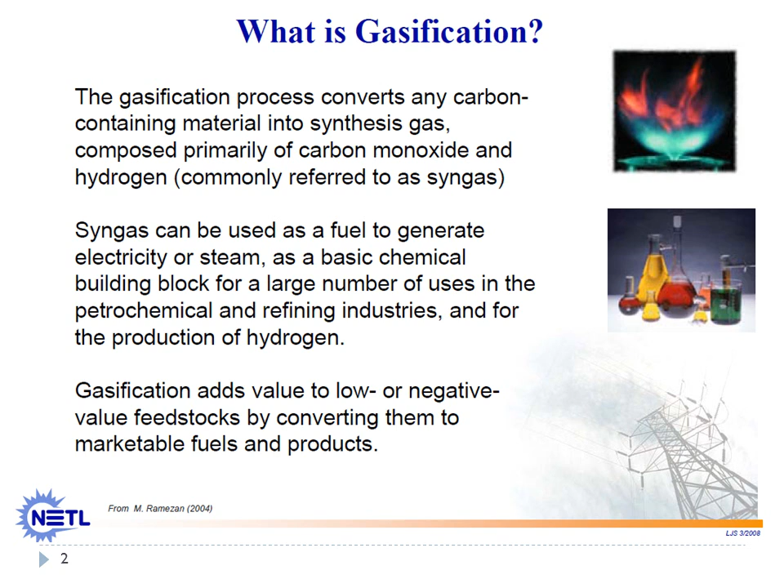I want to point out that these entrained flow gasifiers are some of the higher temperature and pressure gasifiers. There are many other types of gasifiers that operate at much lower temperatures and/or pressures. I just want to point out that some of the, we'll call it, modern ones are operating at very high pressures and temperatures.

What you're doing inside the gasifier is mixing water and coal, likely slowly feeding them in - taking low pressure water and coal, putting them together, and slowly pumping them up to the pressure of the gasifier. You're also taking oxygen, probably coming from a cryogenic separation plant where you cool air down and distill out oxygen from nitrogen. Once you distill out liquid oxygen, it's fairly easy to compress it to the pressure you need in your gasifier. Of course, you've got to heat it back up, but that's not too hard since the temperatures here are very high, and it's easy to get the oxygen's temperature back up to where it needs to be to enter the gasifier.

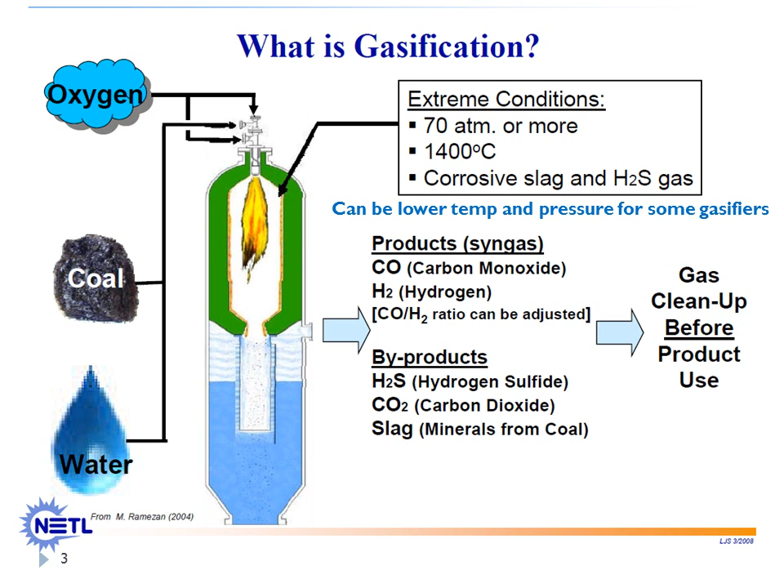These things are going to become molten and then likely molten on the side walls, perhaps interacting with your wall material. I want to point out that it's one of the definite areas of research, the molten ash wall interaction. So before you can do anything, you're going to have to get rid of those byproducts that you don't want.

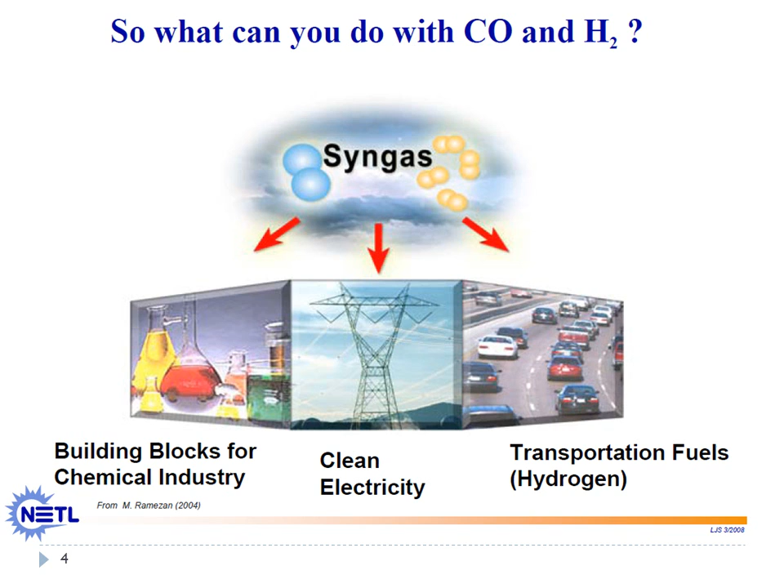But of course the drive here is that once you have the carbon, if you clean the carbon monoxide and hydrogen, you now have the building blocks for the three major industries. You have the hydrogen that can be used in PEM fuel cell vehicles to drive your car, which, if you live in Los Angeles right now, you can purchase. The second one, electricity, is available almost everywhere. You can combust the carbon monoxide and hydrogen and generate electricity, or you can use it as the building blocks for polymers or fertilizer.

We can have something called the water gas shift, and this could occur inside the gasifier, and could also be occurring outside of your gasifier. The goal of a water gas shift reactor outside the gasifier would be, let's say, if you wanted to tweak the H2 to CO ratio, you'd maybe add water so you had more hydrogen and less carbon monoxide. Or if your goal was to make hydrogen for PEM fuel cell vehicles, you'd put in a lot of water vapor and generate hydrogen in that water gas shift reaction.

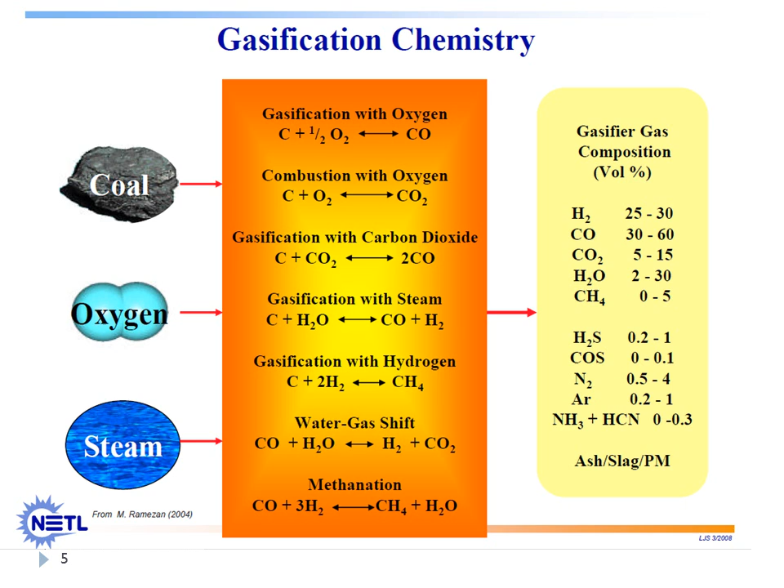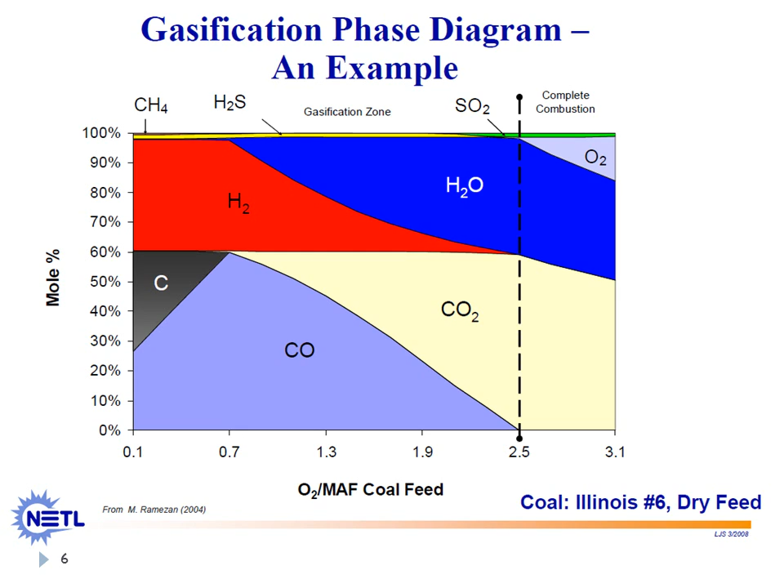With that steam, you can use it to heat buildings, but most of the time it's being used to generate electric power. With gasification, most gasification plants are not used to generate electricity. There are a large number of gasification plants in China that are being used for the production of hydrogen to make ammonia for fertilizers, as well as the production of plastics.

Here in the United States we have a few gasification plants that are being used to generate electrical power, but there's also a couple being used to produce natural gas, as well as others being used for production of ammonia or other chemicals.

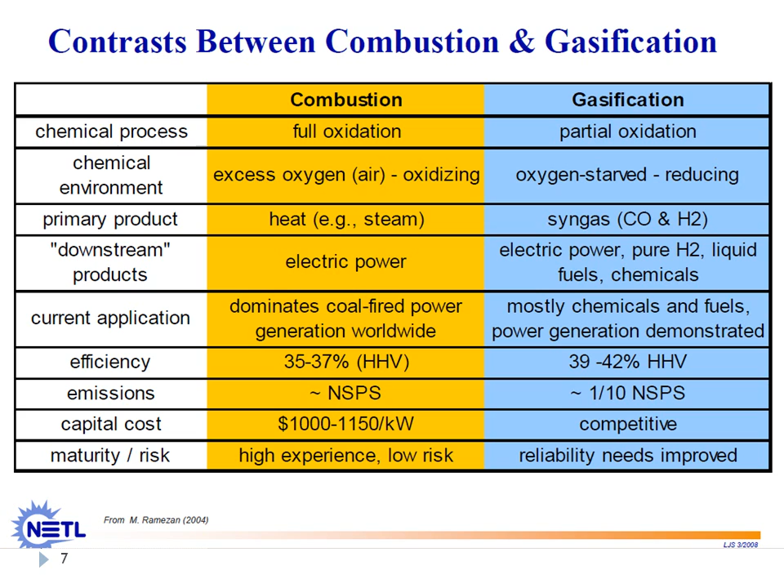Capital costs for these power plants depend greatly. These are some fairly old values in dollars per kilowatt. These numbers have escalated over time, particularly in the 2008 time period when the cost of everything was getting more expensive. It's a little difficult to tell where those costs are right now, especially for gasification, because these are only being built, maybe one every couple of years, or here in the U.S., maybe one every decade. In China, they're being built a lot more, I'd say on the order of one every couple of years.

Next I'm going to show a little bit more pictures of what's going on here. Just trying to remind everyone that this gasification is an extremely flexible type of concept, because we can be taking in carbon-based feeds such as asphalt, coal, or heavy oils.

These are oils that are extremely high in viscosity. Petroleum coke, as mentioned a little before, builds up often in catalyst beds, particularly where they're trying to change the carbon to hydrogen ratio, getting rid of some of the carbon to make it a lighter oil. A lot of times you're left over with this coke. By coke I mean like graphite - it's a solid, a graphite material with a lot of impurities such as sulfur, maybe some nickel, some of the catalyst might be in there as well.

You could potentially also take natural gas, mix it with oxygen to make syngas, and that's something called gas to liquids, where you take natural gas, combine it with oxygen to make carbon monoxide and hydrogen, and then turn that carbon monoxide and hydrogen into gasoline or diesel fuels.

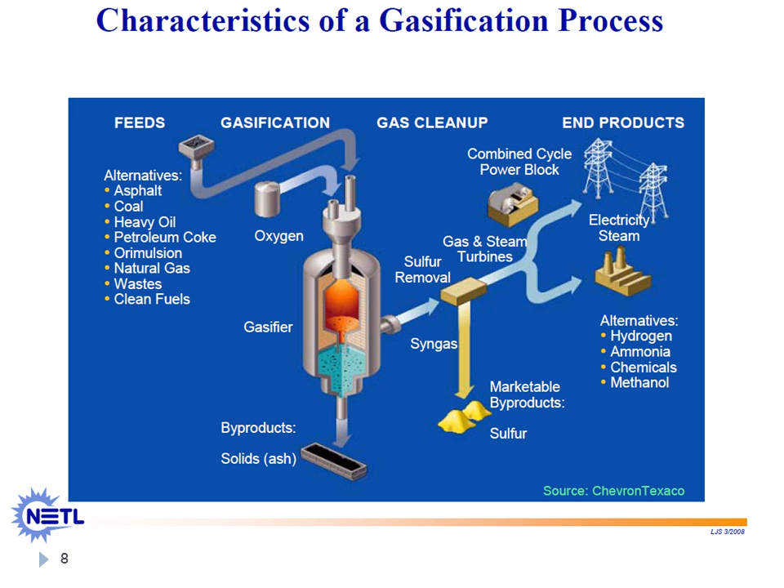Okay, this is the same slide, just from a different perspective. We've got our feedstocks coming into the gasifier, ash coming out the bottom. This is showing, once again, all the different options we have available. So gasification, once again, is extremely flexible.

What I said, you can separate out the hydrogen for transportation fuels. You could also take the hydrogen directly to a fuel cell to generate electricity. Your fuel cell could be your electrical source at the power plant, rather than a combined cycle.

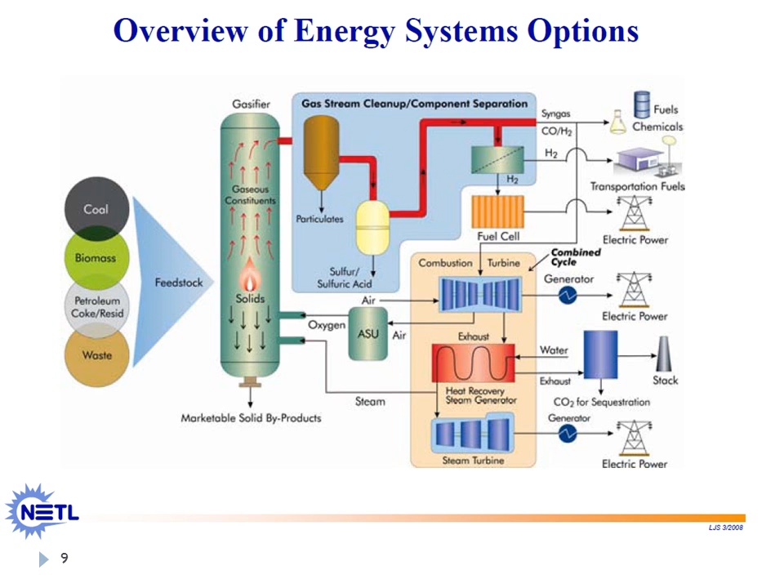But what we're seeing right now, as far as electricity generation, is the fuel going to a combined Brayton cycle, followed up by a Rankine cycle.

And here's even more to follow up what I meant by gasification being extremely flexible. There are a number of different types of gasifiers, and we'll be going through those in this set of slides, a number of different environmental control systems, as well as a number of different options for conversion or final products.

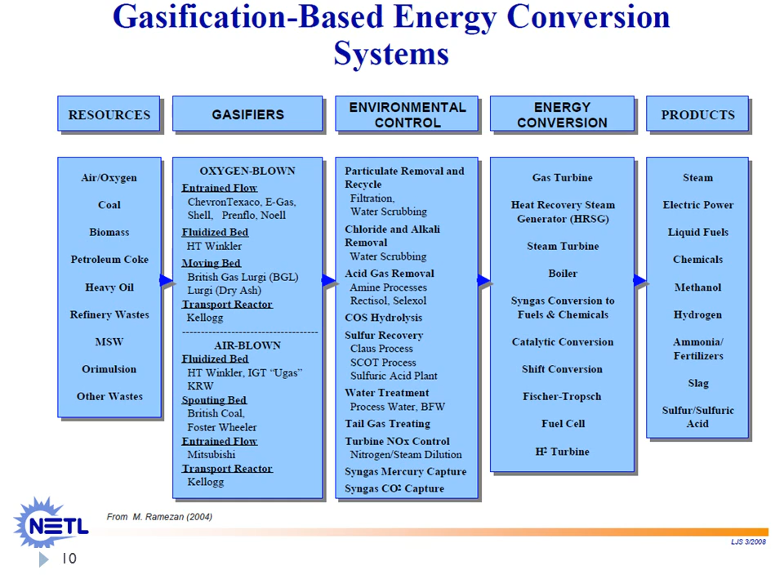Next thing I want to do is compare and contrast a conventional coal power plant with an IGCC power plant, and just give you a feel for the flow of enthalpy throughout the power plant. So in this case, we're going to start with there being 100 megawatts of enthalpy. This is the combustion enthalpy of the coal.

So at a conventional pulverized coal power plant, you're adding coal into a boiler, and that 100 megawatts enters into the boiler and is used to heat up steam. Maybe about 85 megawatts of the original 100 megawatts goes into the steam, which means about 15 megawatts is leaving as enthalpy in the flue gas.

So that 85 megawatts of enthalpy of steam goes to a steam turbine, and in the ultra supercritical, modern coal power plants, about 40 megawatts of that 85 megawatts of steam can exit as electricity, and the other 45 megawatts of enthalpy leaves as cooling water.

Now, just as a reminder, I'm not talking here about exergy, because there's very little exergy in that 45 megawatts of cooling water, and very little exergy in that stack flue gas. The amount of exergy is maybe 2 megawatts in the stack, and maybe 2 to 3 megawatts of exergy in that cooling water.

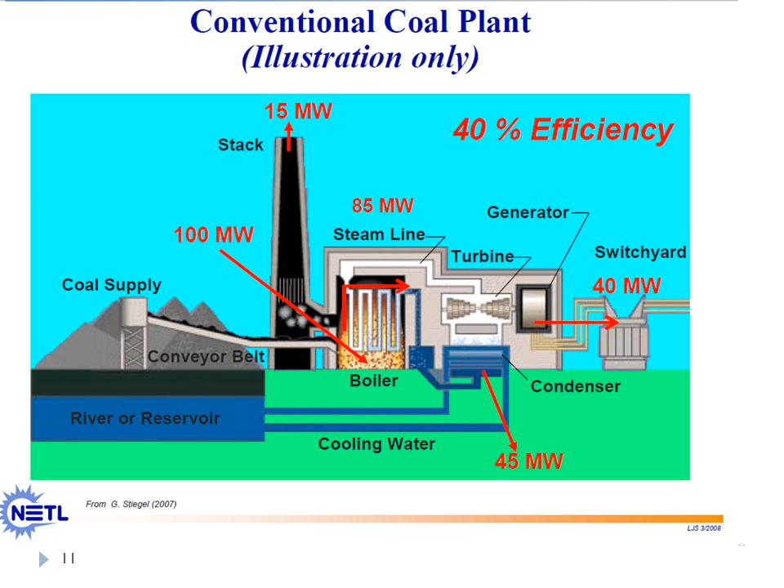Okay, so in that last case we had an efficiency of about 40%. Coal-based IGCC power plants are typically around 40 to 43% as well, but it's going to look slightly different. So in this case, we're going to take that same 100 megawatts of enthalpy, and feed it into a coal gasifier. In addition, we're going to send in some oxygen.

That oxygen is actually going to need 9 megawatts of electrical energy, which we're going to have to subtract off in our final calculation of the power. So that goes into the gasifier, as well as steam that was generated from the syngas when you cool it.

And so then what's going to be entering into the Brayton cycle is going to be 80 megawatts of enthalpy in the form of hydrogen and carbon monoxide. We're going to combust that in a gas turbine. We're going to generate about 30 megawatts of electricity, and that leaves us with about 50 megawatts of enthalpy in that flue gas. And from that flue gas, we're going to...

...take it to a heat recovery steam generator. We're going to generate some steam, and we're going to have steam, that 15 megawatts of steam that was generated from the syngas cooler as you cool down the syngas.

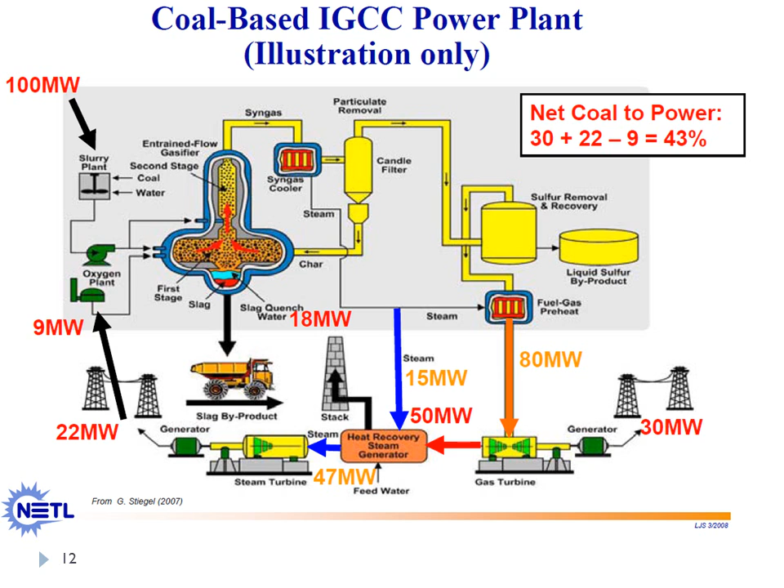This can also be shown in what's called a Sankey diagram. This is a little bit closer to what we'll be discussing later when we show exergy, when we try to calculate the exergy destruction in each of the subsystems.

Here, what's happening is you're flowing through the raw exergy of fuel, and you can see where exergy is actually lost and where exergy is taken and moved other places, such as that steam that bypasses, coming from the gasifier from cooling the syngas and being sent over to the steam cycle.

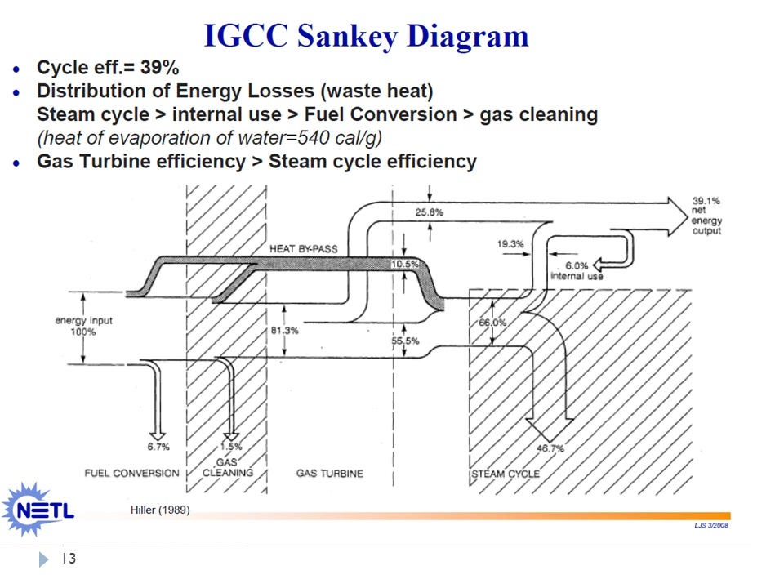This calculation was done back in 1989, and calculated a net efficiency of about 40%. Efficiencies now for a coal gasification plant without CO2 capture are closer to 43%.

The next thing I want to do is give a little bit of history about fossil fuel use. The history goes back a very long time. China was one of the first countries to start using coal, and then it really started taking off around the 1800s.

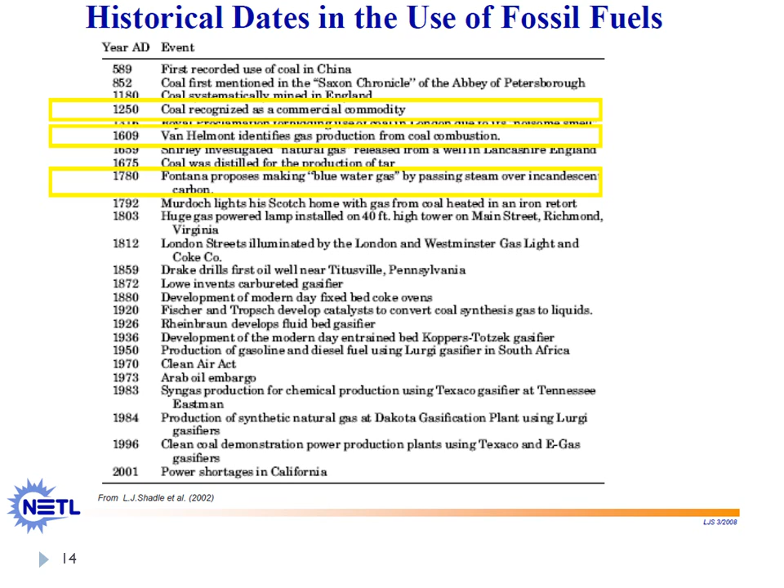In the 1800s, there were actually a lot of coal gasifiers. Most cities had their own coal gasifier. So it's kind of interesting that coal gasification, which right now is not a concept very well known, was a very well known concept over 100 years ago.

Towns would have these combined processes in which they would take coal, partially combine it with oxygen in one reactor, and then take those hot coals over to another reactor in which they would quench it with water. The act of quenching with water would cool it off, but it would also generate hydrogen and some carbon monoxide.

So that gas from the quenching with water would be sent in pipes, and it was used like, if you've ever heard the term the gas lamp district in San Diego. These are gas lamps. Originally, the gas is coming from these coal gasifiers, where you're taking hot coal, mixing it with water, and that town gas is about 50% hydrogen, with the rest composed of methane, carbon dioxide, and between 3 to 6% carbon monoxide.

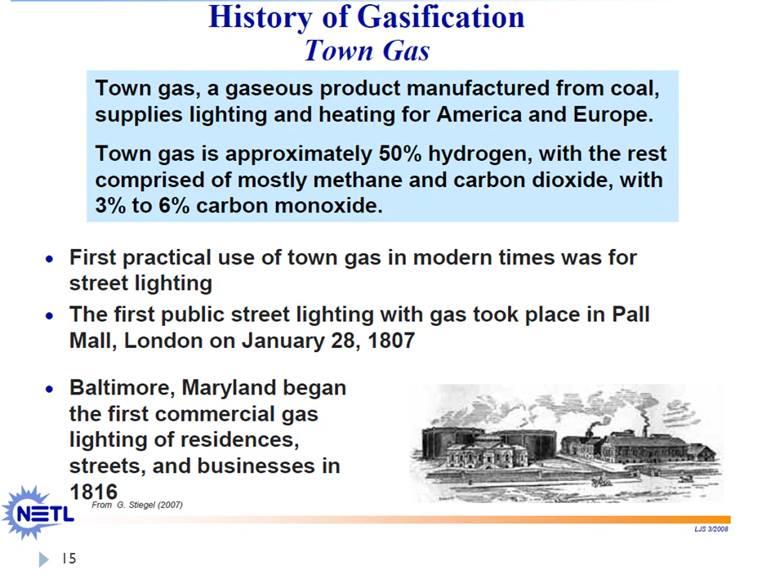And the modern natural gas industry produces a product that is safe for us to use in our homes. Safe for most of us to use in our homes. There's always going to be some people who will figure out how to misuse it.

So what I want to point out here is gasification really started taking off, and then it went out with the advent of natural gas drilling in the early 1900s. Those town gas plants started closing down, and there was almost no gasification, particularly around World War II.

Other than in a few places such as Germany, where there were large amounts of coal reserves and not much natural gas. Then you started seeing locations around the world with large coal reserves and not as much natural gas. You started seeing in the 70s and then the 80s and 90s a generation of coal gasification plants.

One of the first big jumps in the late 1970s is shown here as the Sasol 2 and Sasol 3, coal gasifiers in South Africa used to generate liquid fuels. They were taking coal and turning it into liquid fuels, starting around the time there was a ban on selling liquid gasoline fuels to South Africa. So South Africa decided to create their own liquid fuels. There were also some here in the U.S.

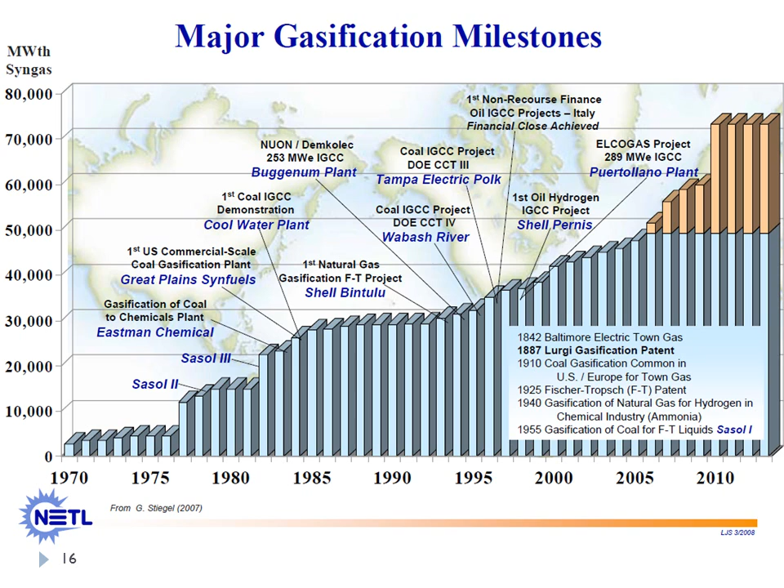One of the first coal gasification IGCC plants was demonstrated in the mid-1980s, called the Cool Water Plant in the U.S. We also have the Buggenum plant, which I believe is in the Netherlands. We have the DOE-funded Wabash River and Tampa Electric plants in the 90s. Then there's the Puertollano plant in, I believe, Spain, coming just before the 2000s. And then most recently, Duke Energy, a few years ago, built an IGCC power plant in Indiana.

Here I'm going to go through a couple of slides where we talk about the different types of gasifiers.

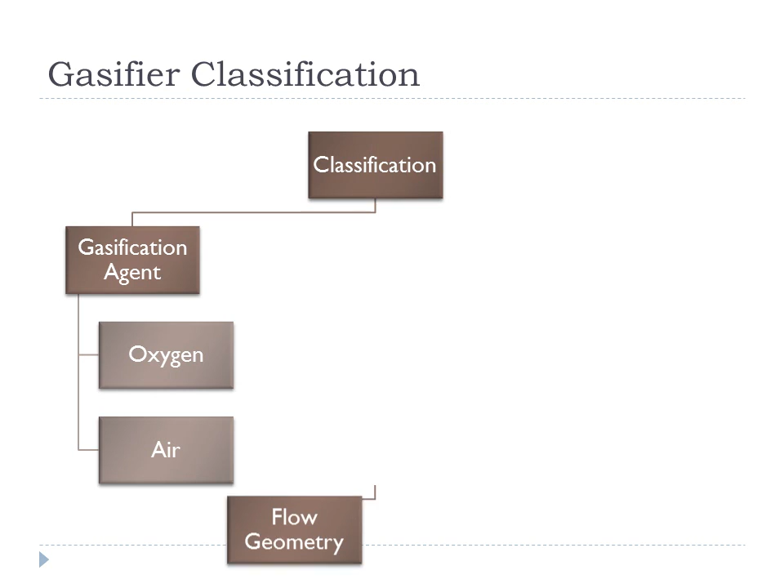The first thing we'll talk about is the gasification agent. We can use pure oxygen coming from an oxygen separation plant, or potentially just use air. You probably would not use air if you're trying to make chemicals or do CO2 capture, because the nitrogen dilutes everything. But if you were just doing biomass gasification for power plant production, you may use air because you don't want to do the oxygen separation, and that would be the case if you didn't need to capture CO2.

You have a number of different flow geometries. You could run counter-current, where the coal drops in from the top and oxygen comes in from the bottom, running counter to each other. Or you could have co-flow, in which the oxygen, coal, and steam all start in the same location, and the syngas comes out the other side of the reactor.

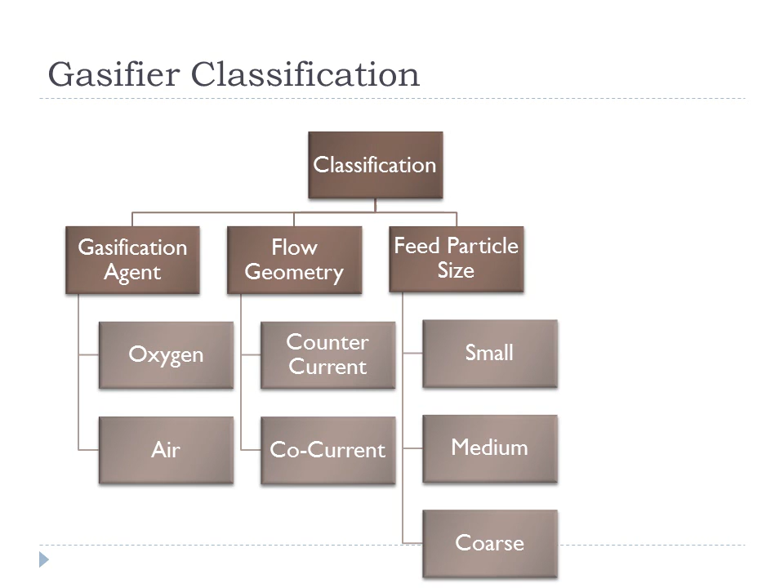You could have variable feed size: small, meaning only micron size, or anything up to coarse, meaning if you put in municipal solid waste, something the size of a plastic cup. Here we're talking about a macroscopic scale.

Ash removal can be done depending on the gasifier temperature. You may stay below the ash melting point, which we call dry ash removal, or the ash may leave as slag, which we call wet ash removal, when the temperature at which the slag leaves the gasifier is above its melting point. That melting point is a function of a lot of things, largely the ratio of the number of basic species to acidic species in the ash.

By basic species, I don't mean aqueous bases—we're talking about solid bases or solid acids. Solid bases are lime, or calcium or magnesium oxide, or other basic species like potassium and sodium, or lithium. These are all solid bases. The solid acids are silica, SiO2, or alumina.

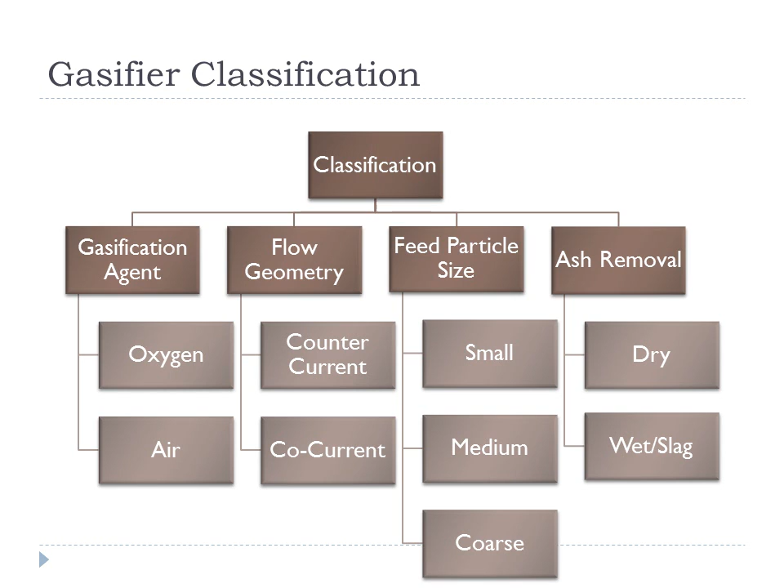Something with a very low melting temperature typically occurs when the base to acid ratio is close to 1. When you have equal amounts of acid and base, that typically creates a low slag melting temperature, and as you move away from that 1 to 1 ratio, that causes a higher slag temperature. Something like pure lime takes a very high temperature to melt, as does pure silica. But when you mix silica with lime, and particularly add some sodium, the slag temperature can start dropping down. So whether you have dry or wet ash removal depends on the ash composition as well as the temperature.

Here we're going to cover the gasifier types in words before showing pictures. We have the moving bed, and Lurgi is the most famous of the moving bed gasifiers. We have entrained flow, which includes GE, Shell, ConocoPhillips, and Siemens designs. Entrained flow gasifiers are slagging gasifiers, run at such high temperatures that you're above the melting point of the ash. In between these two is the fluidized bed, which could be either a transport gasifier or a high temperature Winkler gasifier. I'll go through all of these in the next couple slides.

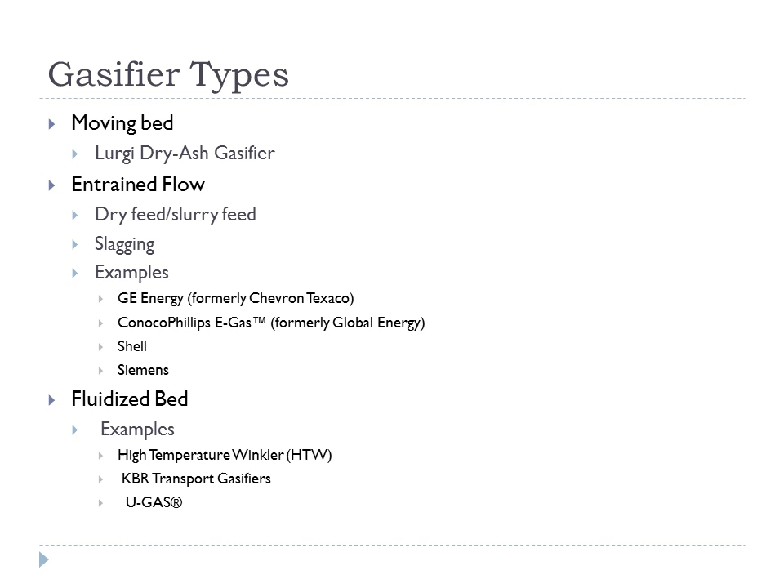Let's start with the example of the moving bed, which we'll spend more time on in detail. The moving bed is a counterflow gasifier: coal comes in the top, and steam and oxygen enter the bottom. A lot is happening, but one way to describe it is that it's very much like a counterflow heat exchanger. If you look at the temperature profile from top to bottom, the coal entering from the top is being heated by the gas that's leaving, just like in a counterflow heat exchanger. The coal is being heated up and the gas is being cooled off.

The gas can leave at around 1,000 degrees F, maybe 500 to 600 degrees C. On the bottom, there's also a counterflow heat exchanger effect: the oxygen and steam come in cold and are heated by the ash leaving the system. The ash acts like the hot side of a heat exchanger, but there's no wall material—it's direct heat exchange. This makes it a very efficient type of gasifier because it's built in counterflow mode, and counterflow heat exchangers are typically much more efficient than co-flow designs. As far as efficiency goes, a moving bed is very efficient.

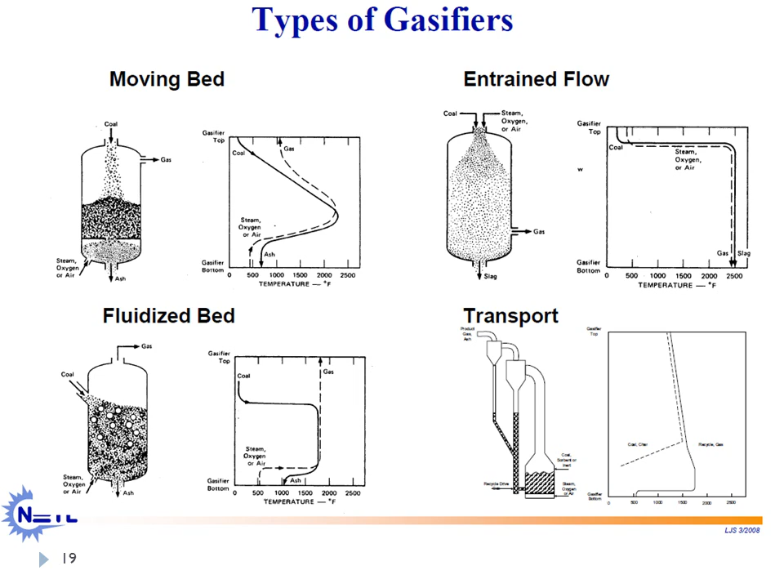Okay, here's some more pictures of the gasifier types. Going through, starting on the left, this is a picture of the Lurgi dry ash gasifier.

The bottom one is closed and the top one is open. The feedstock goes in at atmospheric pressure. You then close the top feed, so both are closed. You then pressurize it with pressurized gas from your gasifier. You open the bottom one, let the feedstock drop in, then close that and suck the pressure out of it so it goes back to atmospheric or below, because you now have syngas you don't want to release to the environment. So you empty out all the gas, and then you can finally open the top and put feed back in. It's not the most efficient, but it works, and lock hoppers have their own issues.

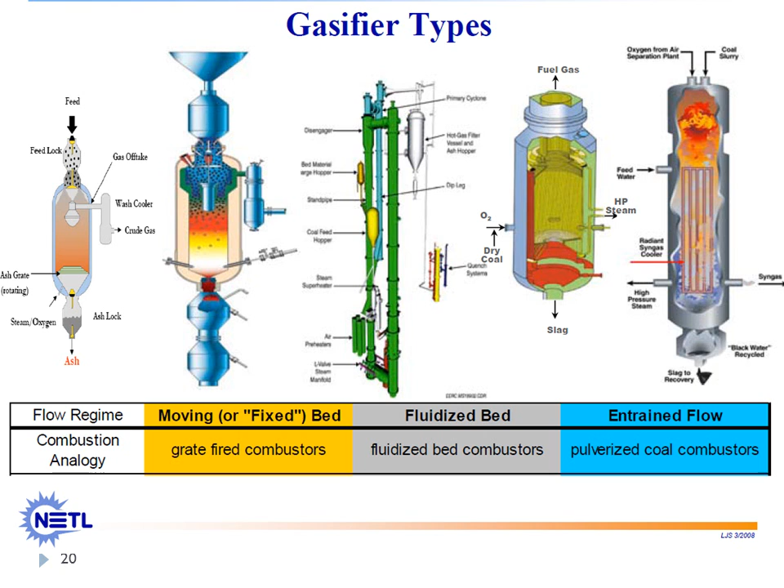Most moving beds are done with a low coal rank. By low coal rank, I mean subbituminous or lignite coal, which has much higher reactivity than a bituminous or anthracite coal. And because reaction rates are fairly slow in the moving bed due to the size of the particles, moving beds are best for highly reactive coals. Those are the coals that have been underground the least amount of time, which are the lignites and subbituminous. The longer it's in the ground, the more it becomes like graphite, and graphite reactions are much, much slower than the reaction rates for a lignite coal or a biomass.

So this is why for biomass you could be sending it to a moving bed. Municipal solid waste likely has typically the same reaction rates as biomass, or faster, and so a moving bed may make a lot of sense for a waste gasifier, particularly because your municipal solid waste may be very hard to make into very fine particles. Because of all the other junk that might be in it, you may not want to pulverize it, so a moving bed makes a lot of sense for municipal solid waste.

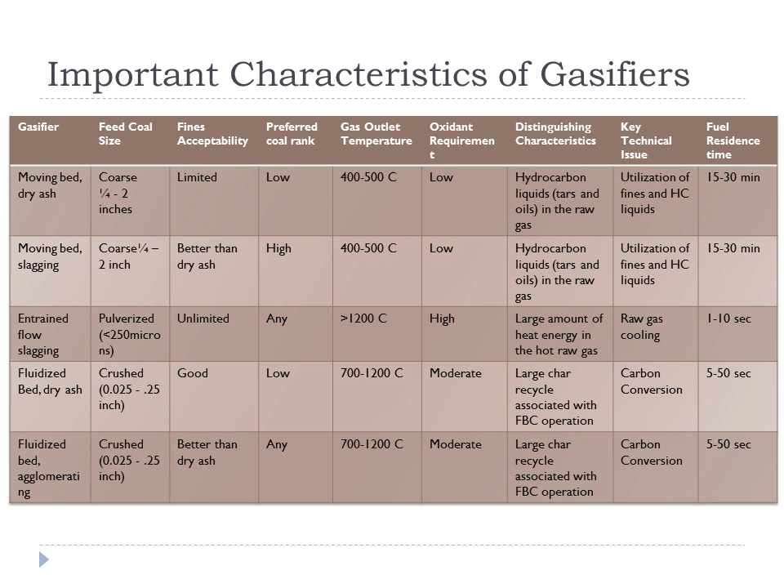So there's going to be a lot of things that could affect a gasifier: the energy content of your fuel, the moisture content of the fuel, the amount of volatile matter. That's particularly going to be an issue in those moving bed ones. You may have a lot of tar production, and you may or may not want the tar being produced.

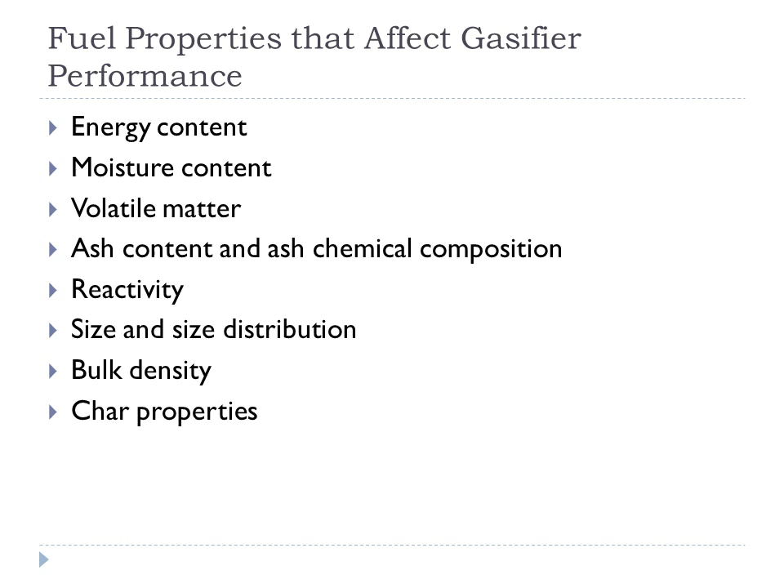Of course, the ash is going to have a major effect. If you just have a lot of ash, then you're heating up and cooling a lot of ash, and that's very inefficient, which normally lowers the efficiency of your process. The reactivity of the coal is going to be important, as well as its size or size distribution, and its density could be important, particularly also its char properties.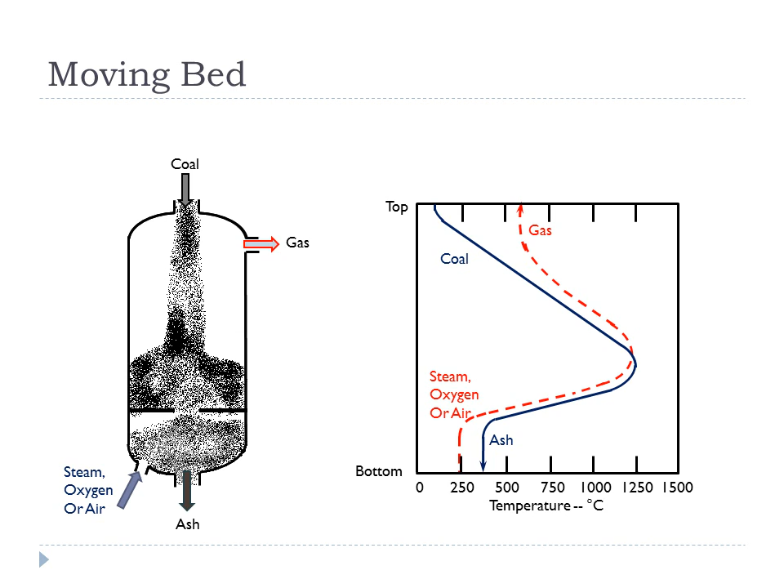As I said before, we have a counterflow heat exchanger between the gas and the coal, as well as a counterflow heat exchanger between the ash and the steam or oxygen. So this is where the moving grate would be, kind of at the bottom of this bed, and the coal is being dumped in at the top, and we have residence times on the order of 15 minutes to 30 minutes.

The dry bottom Lurgi gasifier was developed with cooperation of the University of Berlin. It's now owned by Sasol, which is a South African company, and they are still designing new gasifiers. I think they're on the Lurgi Mark 5 or 5 Plus. They continue to make new gasifiers of this moving bed type.

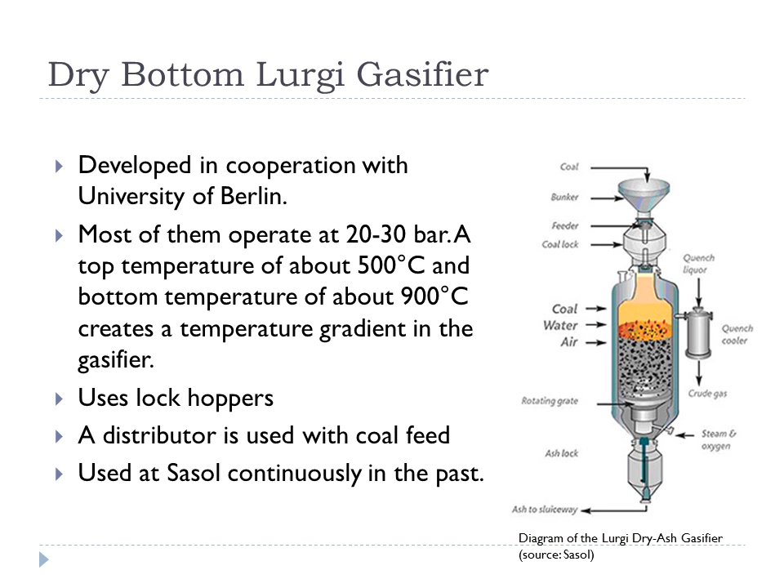As I said before, there are lock hopper feeders both at the entrance for the feed and then for the ash as it leaves. There's that rotating grate, and because of the tar production, there's normally a quench afterwards, and then your clean gas free of tars would be going into downstream equipment.

Here's another zoom in of the Lurgi gasifier, showing the same thing. This time I wanted to point out this image on the right, which shows the breakdown where we have, as I said before, drying, so the water vapor leaves, and then devolatilization, that's where the

pyrolyzation is occurring. Methane and tars may be leaving. Reduction is when we start having steam-coal interactions, and then combustion is coal with oxygen. By the end you have no carbon or hydrogen left, just your inorganic ash that is being used to heat up the oxygen and steam.

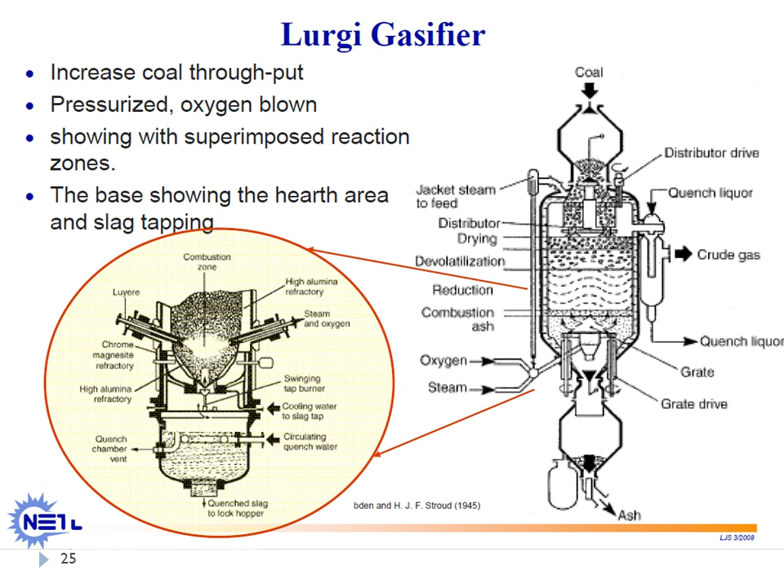Here's what a Lurgi Mark IV gasifier looks like. There's a picture of a person in this photograph for scale. This is a photograph from the Dakota Synfuels plant in North Dakota, and at that site there are 23 Mark IV gasifiers, handling about a quarter

of a ton per second of lignite North Dakota fuel, and also about 57 kilograms per second of pure oxygen and about 300 kilograms per second of steam. So these are very, very large gasifiers. The output includes 21 kilograms per second of ash, 13.5 kilograms per second of tars and oils,

and then the bulk is about 600 kilograms per second of syngas. That syngas is about 2% hydrogen, 10% carbon monoxide, 35% carbon dioxide, 4% methane, 1% ethane or propane, and 1% other gases, some of which could be hydrogen sulfide, and then almost 50% water vapor.

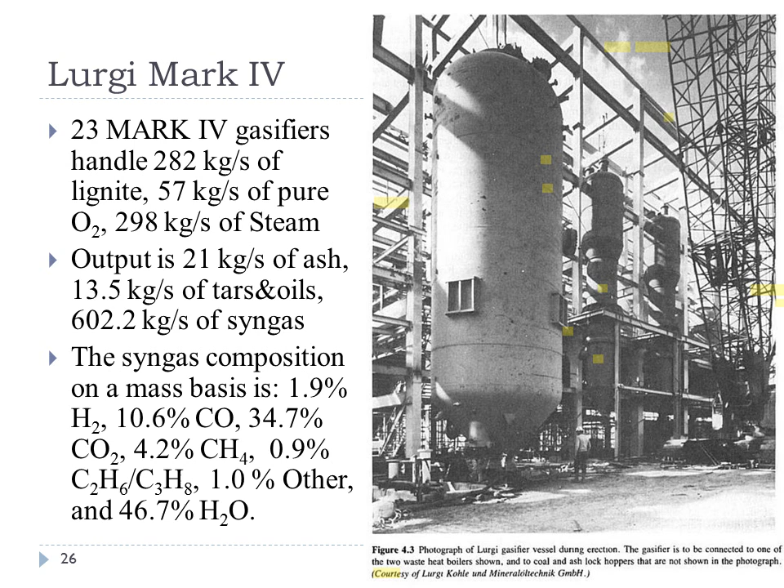Here's a picture of the entire facility, which is in North Dakota and started up in 1984. It was part of a DOE loan guarantee at the time, and that loan is being paid off right now. How much gets paid off is often a function of the price of natural gas. When that number is really high, the amount of the loan paid back goes up, and when that number goes down, typically the amount paid back goes down.

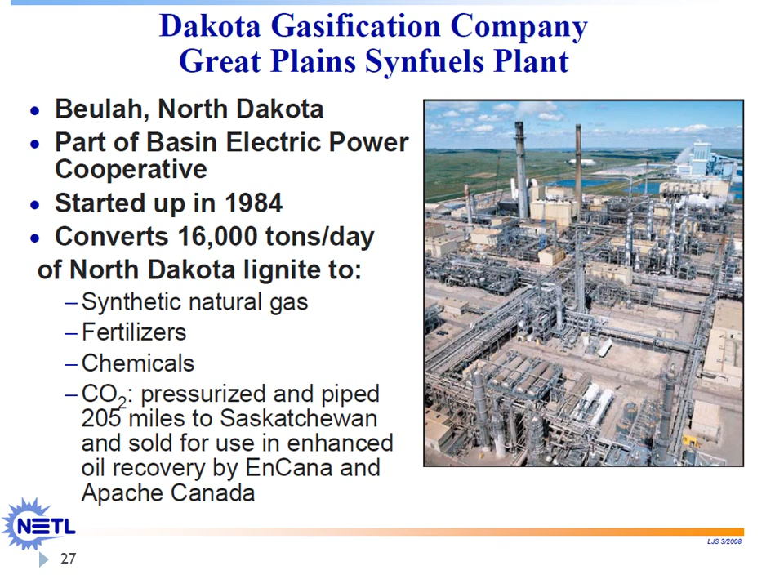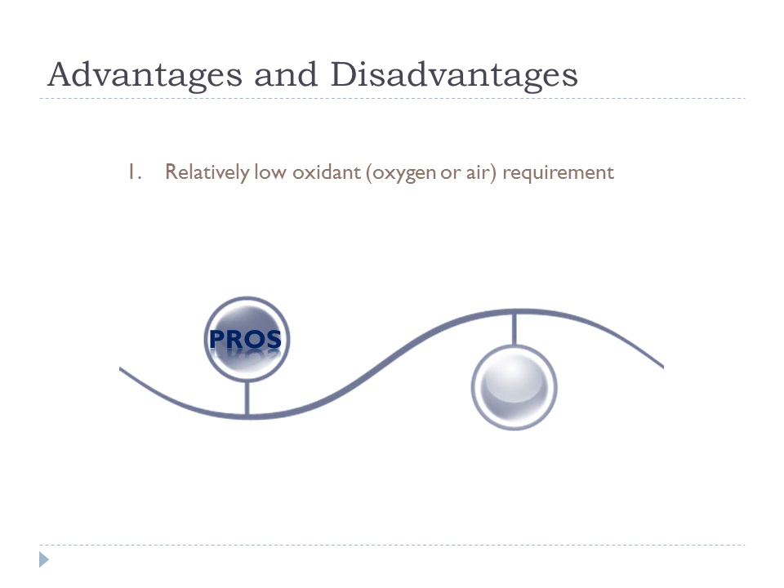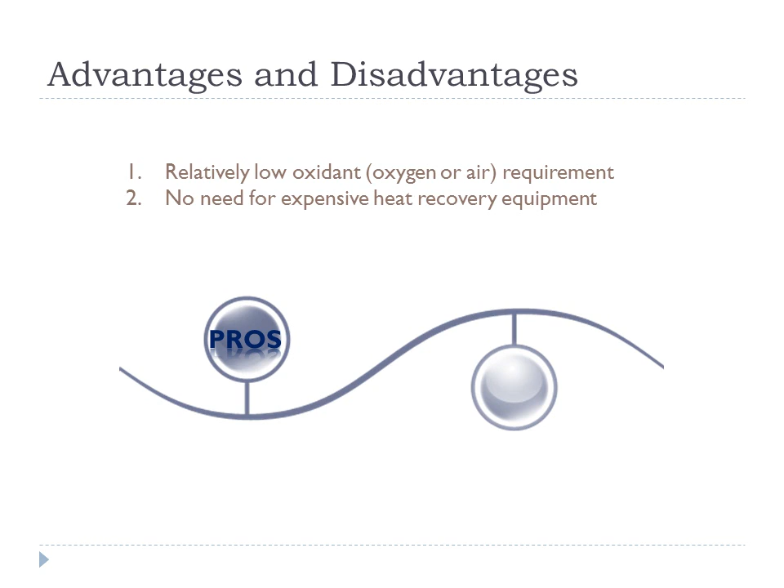Now we're going to talk about the pros and cons. A lot of these have already been mentioned, but just as a re-emphasis: relatively low oxygen is required because it's a counterflow, high efficiency design. You don't need expensive heat recovery equipment because inside the gasifier, due to that counterflow design, you're cooling off the ash and the syngas as it leaves, cooling it with species such as the coal, oxygen, and steam that need to be heated up. So it's a very efficient process.

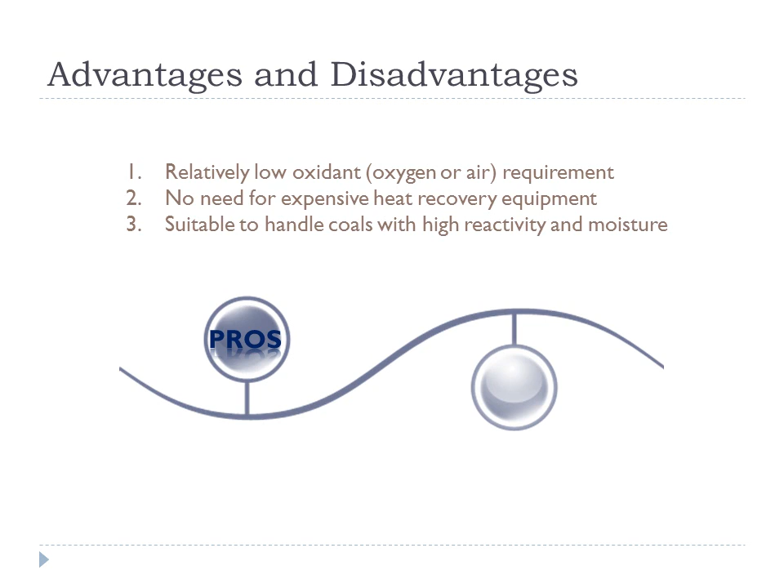It's suitable for coals or even, as I said before, municipal solid wastes, and it can handle municipal solid waste that may be very bulky and unable to be used in other gasifiers. And if your goal is to generate methane, it helps if your gasifier actually starts by making methane, since then you need less downstream methanation. So this is potentially one advantage of this type of gasifier.

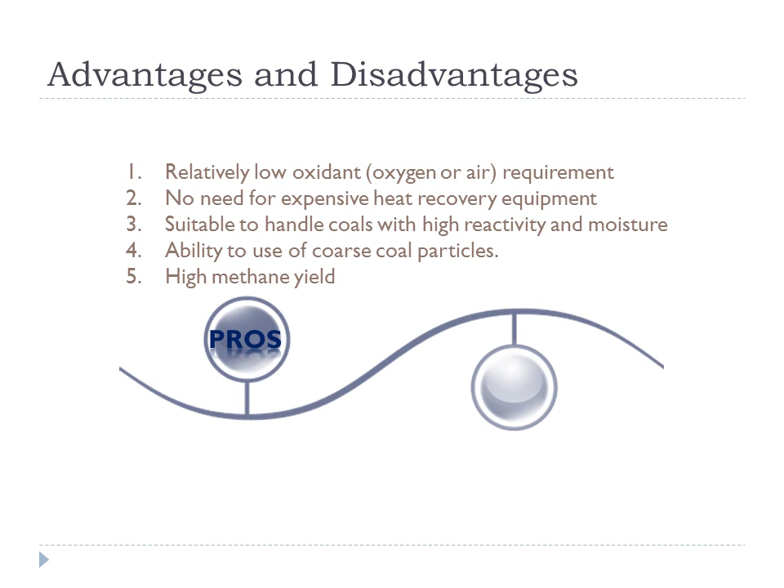The cons: it's not going to be able to handle coal fines. Caking coals - these are coals that, kind of like popcorn, will pop and expand in volume, or form together with other coals into a bridge material, forming large bulk coking products where particles combine with other coal particles.

If that happens, it can be very disastrous in this gasifier, because it could cause what's called a bridge, where you have a solid species spanning the entire gasifier, and you're putting material on top of this bridge while there's now a gap below. The material below will start falling out because of the ash grate. It is something to watch out for in this type of gasifier.

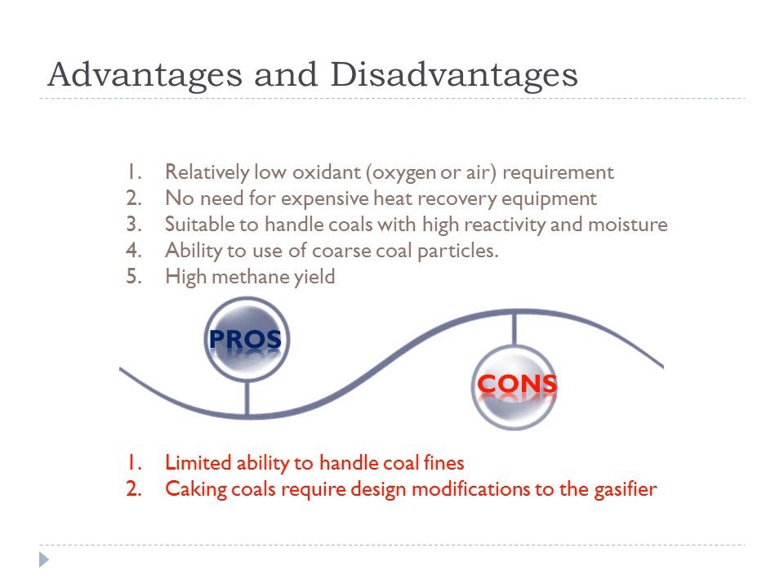There are multiple ways of getting around this. The gasifier I've worked with got around this problem by actually dropping a weight to break up bridges if they ever formed. There are ways of getting around it, but you want to pick materials that are not likely to cause this bridging or caking and building together of the coal particles.

And the last con - I put it here as a con, though it could be a con or a pro - there is likely going to be a large amount of tars being produced. Not large compared to the amount of syngas produced, but large compared to entrained flow gasifiers, where the coal is immediately contacted with oxygen and those tars are immediately oxidized.

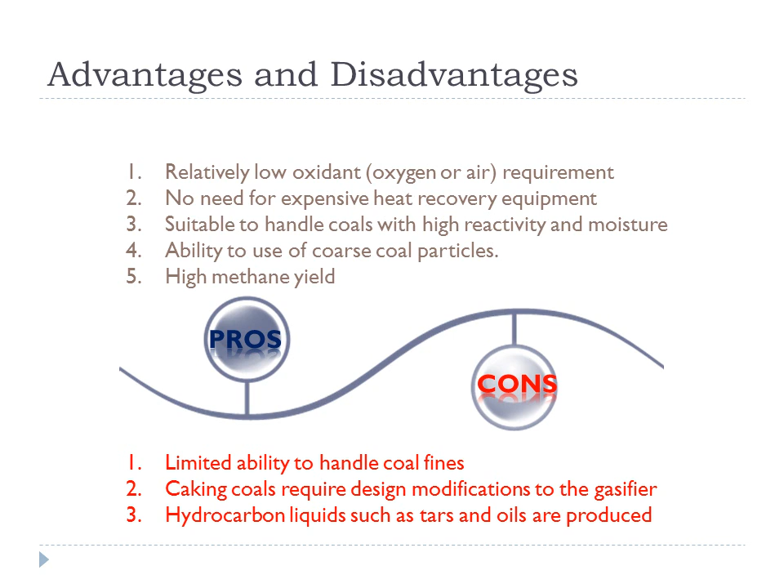So that leads right into the entrained flow gasifier, where the coal, oxygen, and steam are immediately contacting each other, and what's heating up the coal is the combustion process itself. It's not very efficient. As we talked about with the pulverized coal power plant, you don't want to just feed in oxidant and coal and combust it, because it's very inefficient to have a flame heat cold gas. That's kind of what's happening here, with absolutely huge temperature gradients, meaning high potential heat flow, which is largely a source of exergy destruction.

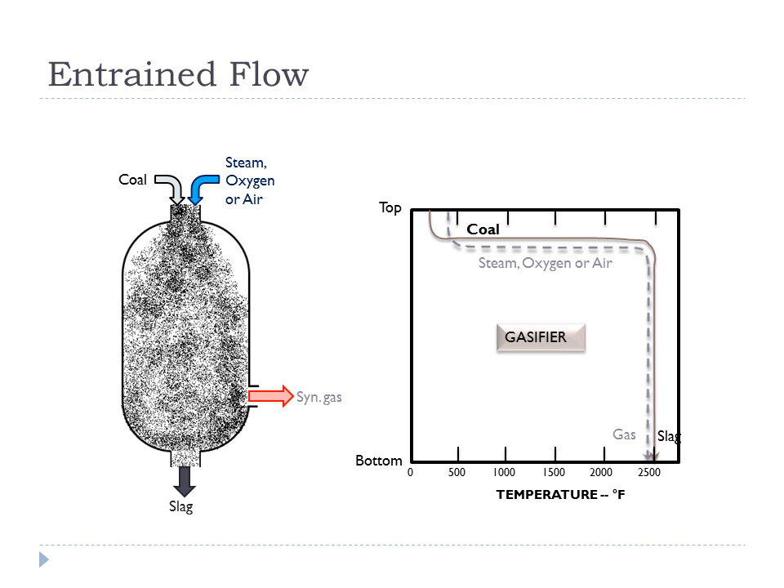You have the gas and slag hot, and you can't cool off the gas with the slag or vice versa, as we were seeing in the counterflow cases. So you have to put in some kind of downstream coolant, quench, or radiant cooler to cool off the syngas and slag. Here are the main two different ways of dealing with that hot slag and syngas.

The first one is called a radiant cooler, the second is the direct quench. In the radiant cooler, like in the pulverized coal power plant, you're putting in pipes carrying steam or water, and you may boil the water to create steam, which is used to cool off the syngas. In the direct quench, the syngas goes directly into a liquid bath, which quenches the gas and the ash. The ash drops to the bottom, and the gas goes up through the sides, bubbling through the water, leaving as a gas stream saturated with water, i.e. 100% relative humidity.

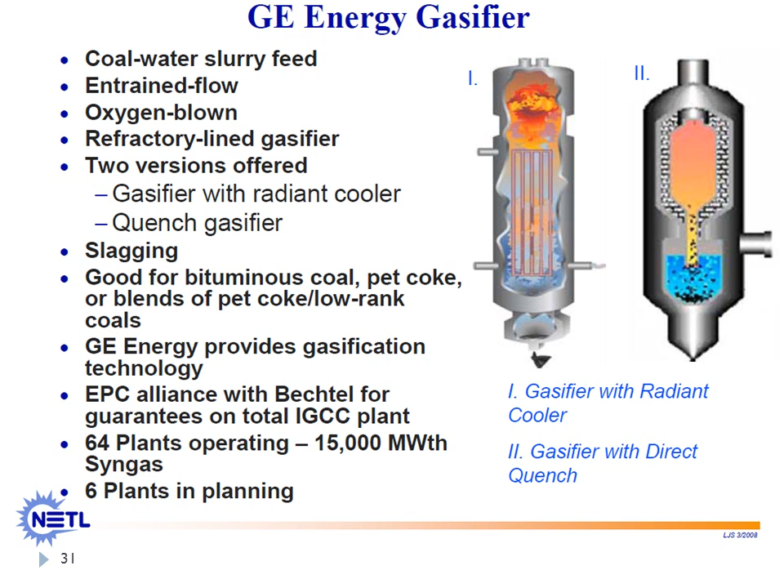So the entrained flow gasifier is very, very fast, meaning you can do all this in a very small size, but it is not very efficient.

Here's a picture from the Tampa Electric Company, the gasifier in Tampa, Florida. We have the gasifier and the radiant syngas cooler, and some other heat exchange convective coolers shown at the bottom. To give you a size reference, I don't see any people in this picture, but you can get a sense of scale from the dimensions of the stairwells. This is absolutely large, multi-story tall.

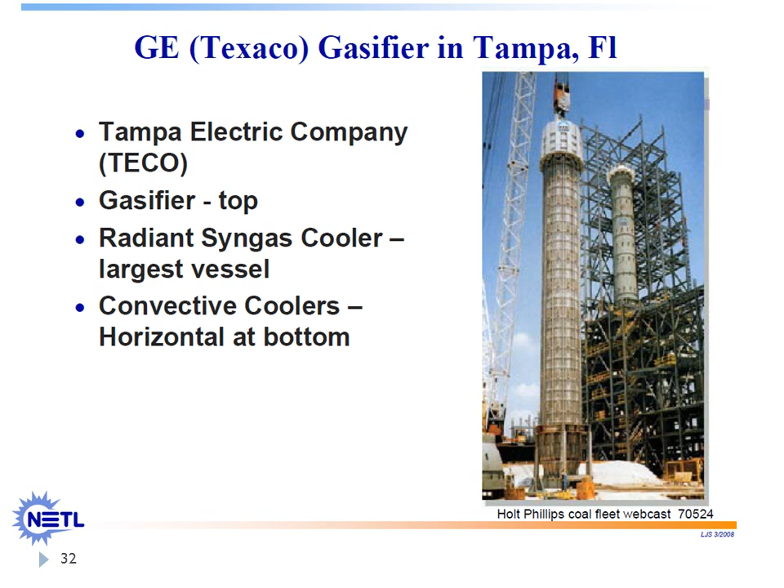So here, the radiant boiler. The pressure depends on your application, whether you're doing IGCC or generating chemicals. This type of radiant boiler was used in the Cool Water and Polk gasification power plants, where we're cooling off the syngas and generating steam.

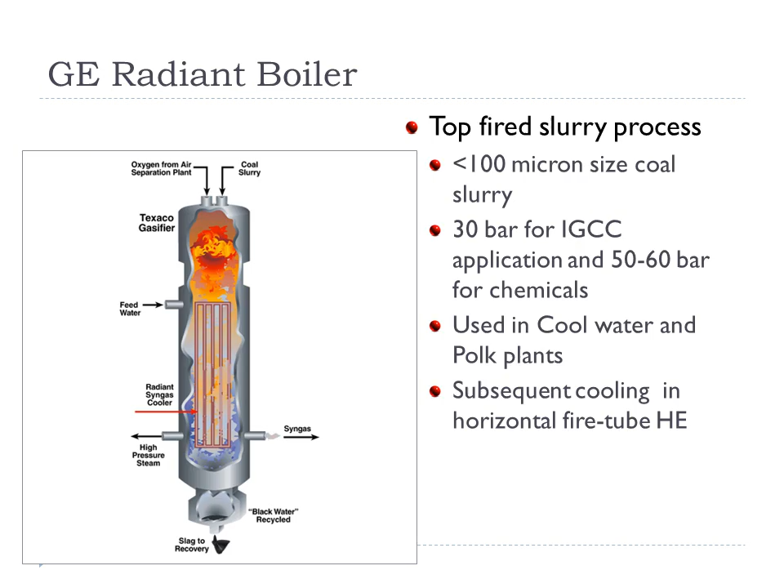Whereas in the direct quench, as I said, we're actually going through a bath of water, and this one is extremely inefficient. This entrained flow direct quench is going to be the least efficient of all gasification designs, but it'll be extremely compact and simple in design. So of course there are always trade-offs, right? It's very low efficiency but can be extremely compact, and this has been used because gasification is not cheap, so anything you can do to keep the cost down is good, as long as it's not too much at the cost of efficiency.

The temperature that saturated syngas is leaving is typically on the order of between 200 and 300 degrees C.

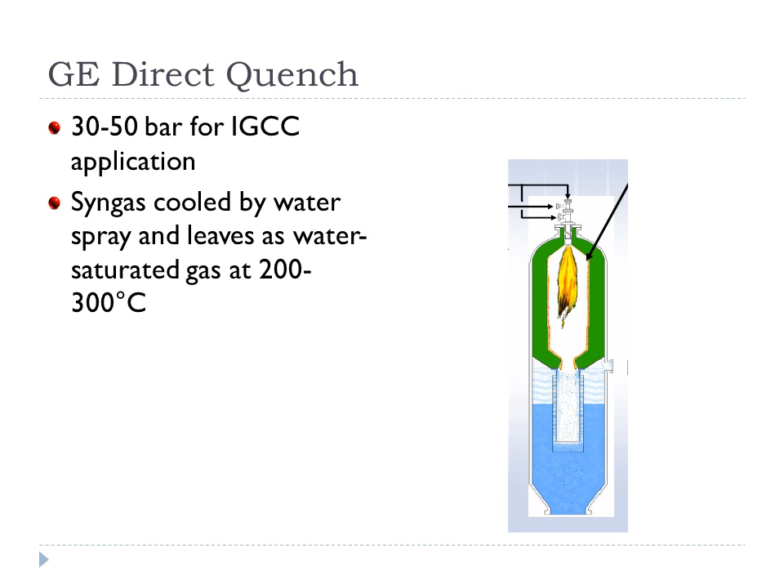The next thing I want to talk about is syngas cleanup. As a reminder, we have our fuel constituents, which could be tars, or you may want to put the tars in the contaminants list depending on how you view them. We also have non-fuel species, which would be some of the diluents in there, like carbon dioxide, water vapor, nitrogen, and argon.

And then we have our contaminants that we're going to need to get rid of. Definitely going to be needing to get rid of particulates, sulfur species, and nitrogen that gets bound into the fuel in either the form of ammonia or hydrogen cyanide. We'll have the halides too, the chlorines, bromines, fluorine, and that could be in coal.

If the halides are in the form of salts like sodium chloride, then they don't necessarily pose that much of a problem, though of course we don't want the ash agglomerating on pipes or anything like that, which could cause pressure drops. But if the halides are in the form of acid gases, then this is potentially a problem in either catalyst beds or just for steel pipe.

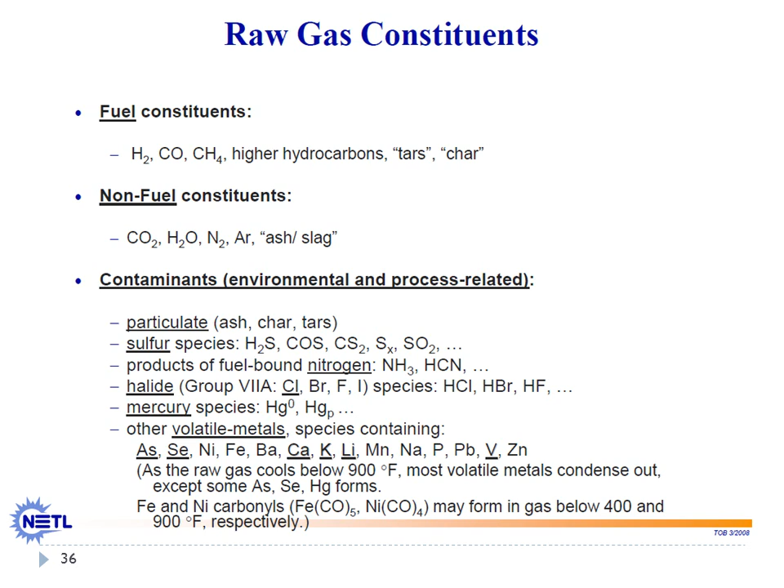Next thing I want to do is move on to the thermodynamics, so we can learn how to model an equilibrium-based coal gasifier. Not all coal gasifiers are actually in thermal equilibrium, but in this lecture I'm going to show how you would model a gasifier if it were in chemical equilibrium.

One way of showing the range in which a gasifier operates is to make a triangle in which we vary the amount of oxygen, carbon, or steam. Here we'd have a case in which you have an air stoichiometric ratio of 1. You could have the case in which you're just sending in carbon and oxygen, and then there's a minimum amount of oxygen that you need to supply, or else you still have some carbon left in the fuel.

And in between these two lines is the range of a gasifier. When you go below the bottom line, you're now fully combusted, or when you go above line F, you are into a pyrolysis phase in which you haven't fully gasified the fuel. Some of it's still there, solids being left over.

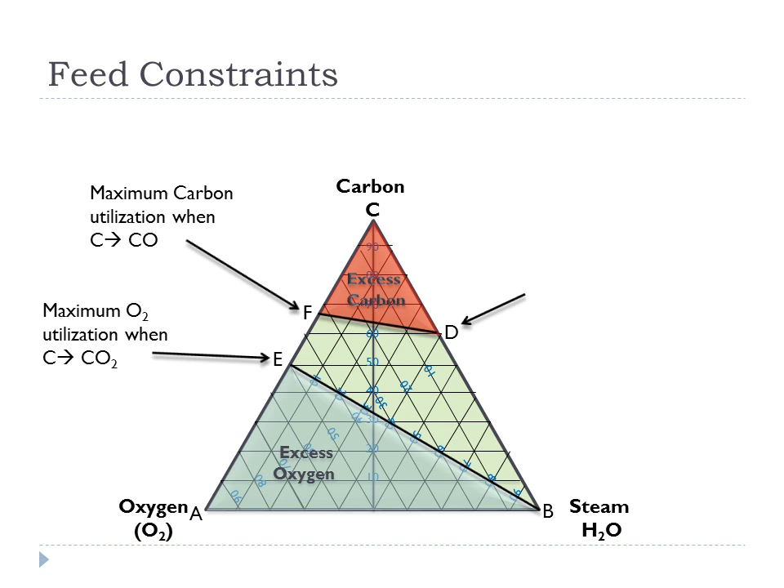Here D is the other extreme, in which you'd be sending in just enough steam to turn the carbon into carbon monoxide and hydrogen. So the range between C, F, and D is called excess carbon. We've got the range called excess oxygen, which is A, E, and B. And then in between, so between F, D, E, B, is the range in which gasification can occur.

One thing to point out here is that when we're solving equations in the gasifier, we're going to be setting constraints that the amount of carbon is equal to 0 and the amount of oxygen is equal to 0. So the reactions taking place are: carbon and half an oxygen, carbon plus a full oxygen, carbon plus hydrogen, and then oxidation of water vapor. So these are 4 independent reactions.

Now we're going to be able to eliminate one of these reactions because we're constraining that there's exactly 0 oxygen. So 4 equations is going to go down to 3. These 3 equations can be written as: the first one is the Boudouard reaction, the second is a type of methanation reaction, and the third is the steam-coal gasification reaction. So what I did to go between the 4 reactions and the 3 reactions is eliminate oxygen. If you notice, there's no oxygen now showing up in this set of 3.

That's not to say there aren't reactions that involve oxygen, but what we're saying here is that we constrain the oxygen composition leaving the gasifier to be 0. So oxygen is not one of the products leaving the gasifier. The way to think about this is that the first or second reactions take place instantaneously so that all the oxygen is consumed, and then you eliminate oxygen as a species, so you no longer need an equation that has oxygen in it, and you can go from these 4 equations into these 3 equations.

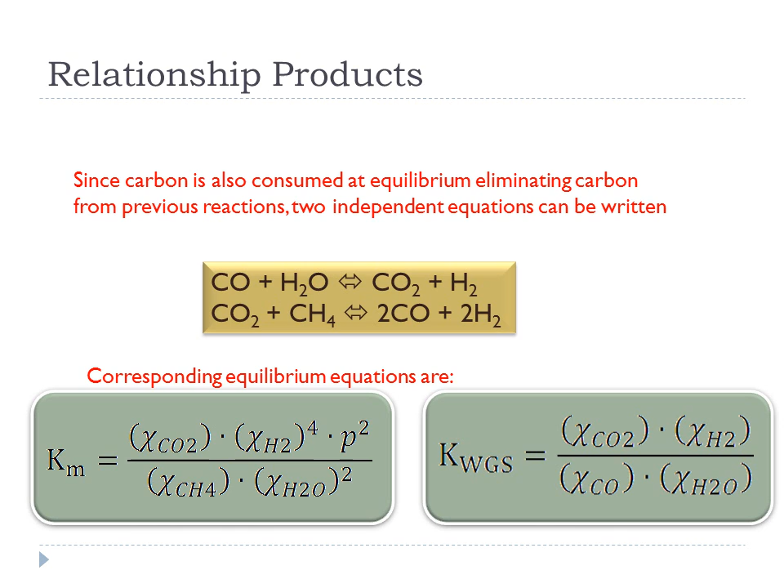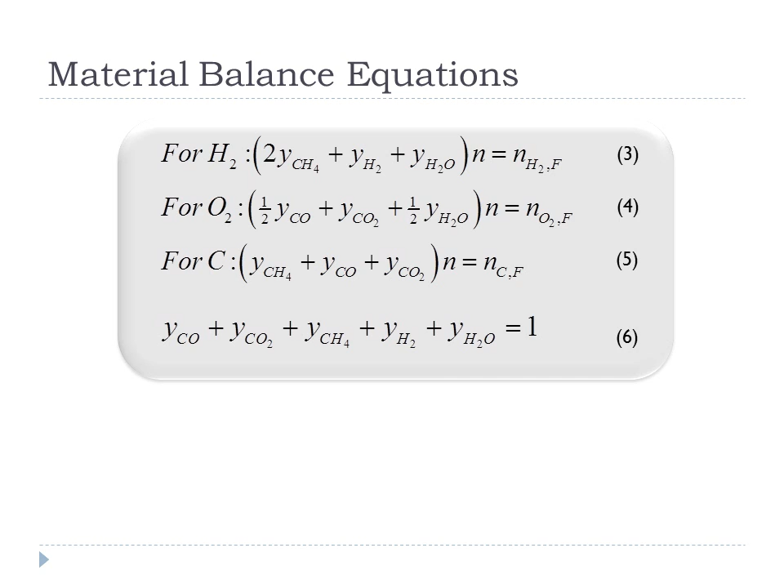What I want to point out here is we're going to set up our solutions so that the number of constraints is equal to the number of free variables. Here for this I'm using Y instead of chi, just because I grabbed from different slides, but Y and chi are the same thing—they're mole fractions. So there are a total of 6 equations and there's going to be 6 unknowns.

Let's go through first what the 6 unknowns are. There are going to be 5 mole fractions plus a total molar flow rate, n dot or n, whichever way we do it. Those mole fractions are the mole fraction of carbon monoxide, carbon dioxide, methane, hydrogen, and water vapor. So we had 6 unknowns.

And then the 6 equations: the 2 K is equal to Q reactions equations. K sub m is equal to Q sub m, and K sub water gas shift is equal to Q sub water gas shift. So that's 2.

We also have 3 elemental balance equations, meaning the amount of hydrogen entering the gasifier has got to be equal to the amount of hydrogen leaving the gasifier. The amount of oxygen entering the gasifier has got to be equal to the amount of oxygen leaving—here I mean elemental oxygen. And the amount of elemental carbon entering has got to be equal to the amount of elemental carbon exiting. So equations 3, 4, and 5 are just elemental balance equations.

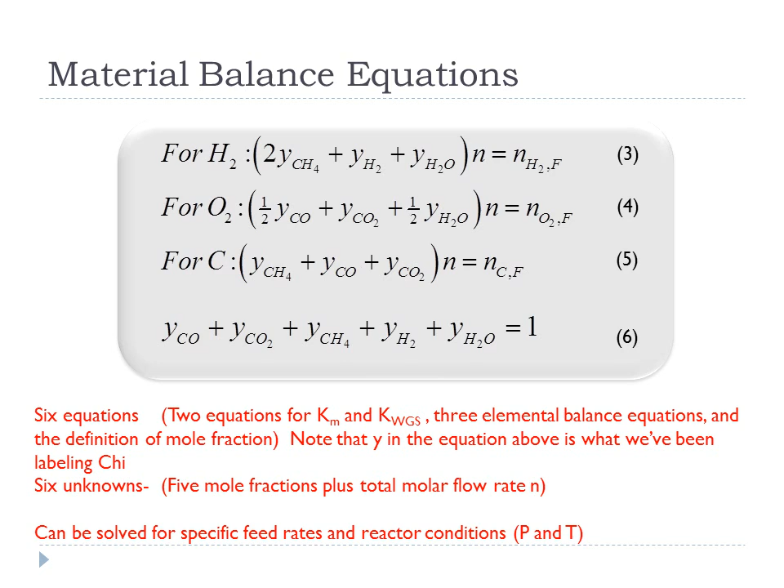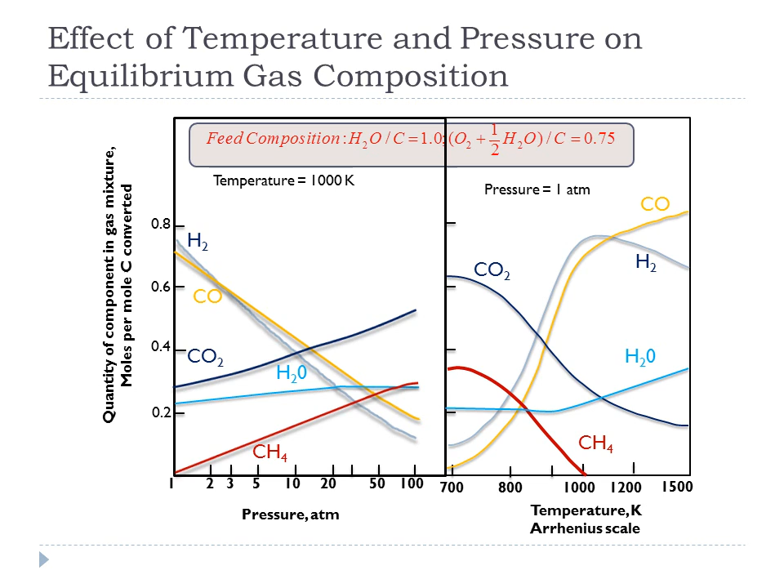So carbon dioxide and methane will decrease with temperature, whereas hydrogen will increase, carbon monoxide will increase, and hydrogen, when you get to really high temperatures, may decrease because of the reverse water-gas shift reaction—some of the hydrogen will go back to water vapor.

Okay, the last thing I want to point out on this slide, as I mentioned towards the beginning of this talk, is I just want to give you a feel for the relative rates of reaction. So we were talking about equilibrium so far, but I want to give you a little bit of feel for kinetics. This is going to be the last slide of this talk.

Part of the reason why you send oxygen into the gasifier is because the rate at which oxygen can attack carbon is about 5 orders of magnitude greater than the rate at which water vapor or carbon dioxide can attack carbon. And those rates are 3 orders of magnitude higher than the rate at which hydrogen can attack carbon.

So when we were talking about that counterflow moving bed gasifier, to give you a feel for what's going on there: the first thing that happens is you put the coal on top, water vapor will vaporize, so any water sitting in the coal will evaporate. Then as the coal heats up a little more, it starts pyrolyzing, and those pyrolysis reactions are actually fairly quick—they're not constrained the way some of these carbon reactions I'm showing here are constrained.

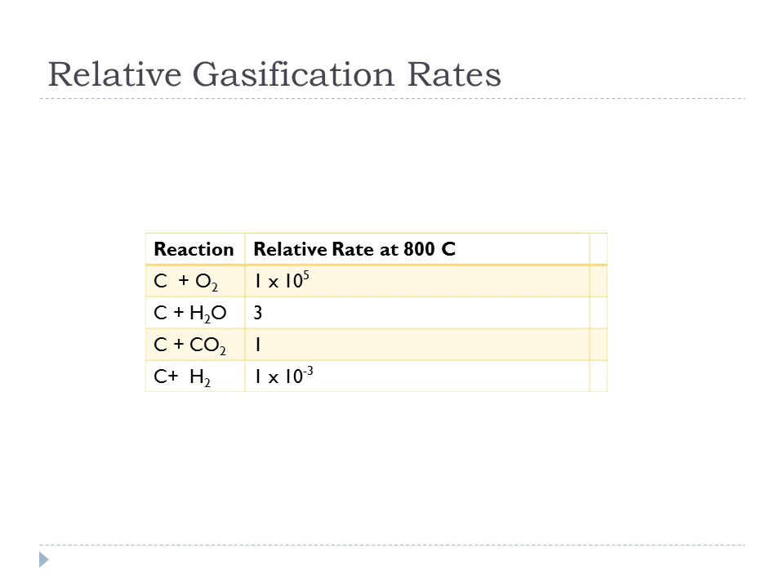Because you can imagine what's happening here: the oxygen is just combusting the carbon, making CO2, and that CO2 is now free to attack coal also, in a form that's a little more efficient, through the Boudouard reaction that makes two carbon monoxides. So I just want to leave you with this to give you a feel for the relative reaction rates of coal with various gases at 800 degrees Celsius.